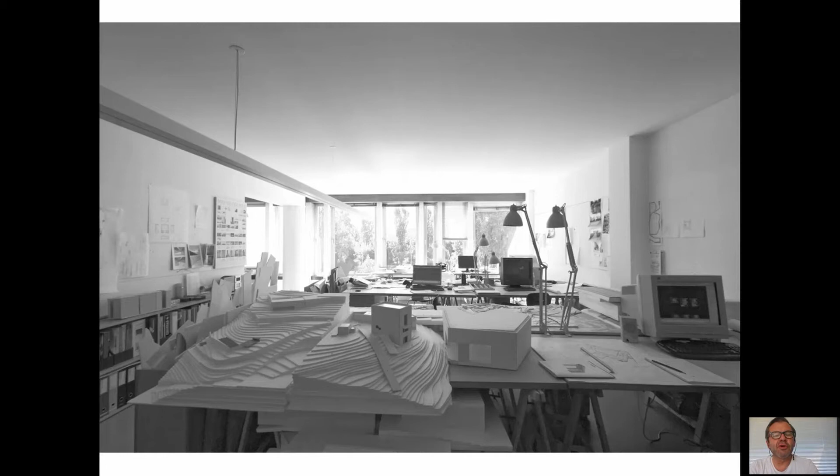I'll show you a little bit the way we work. This is my office, quite a small office - we've never been more than four people working together. I like working like that because we get to know all the different parts of the project, and I believe that with a group of four people, eventually making partnerships with others, we can do all the projects that we can, and we can also control all the details of the project.

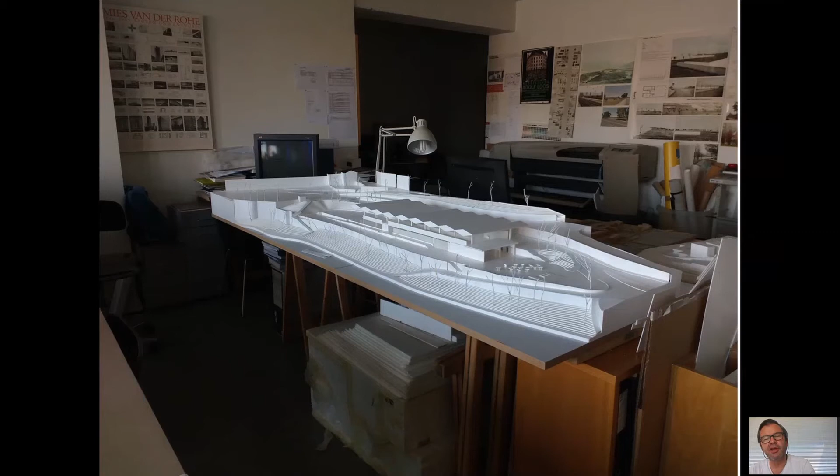So we live in this very banal way that architects work by now, with models and computers. This is another photo of my office, with mock-ups, old windows from buildings that we are trying to copy during restoration, spaces for models, and thoughts on the walls.

An office is always a place where you should think about the things you are doing, not only in your projects, but about the most essential things, and also eventually, naturally, references that you have, both images, architectural or not.

Where am I showing this? I think I am speaking mainly to students. My experience giving lessons, which I gave about 15 years ago in 3 different countries, is that I feel the same problem with students now: they only use computers, or use them in a too expressive way, without getting all the tools we have by hand. I have nothing against computers, I use them a lot, but I try to use all the means we have at our disposal so that we can turn the project or the problems of a project clearer.

And sometimes when I look at younger people, they only use computers, which is something that it's a little bit... well, at the end, what's the point is that the project is good or not. But I think it's a little bit poor when we go too much only into a sort of representation of a project.

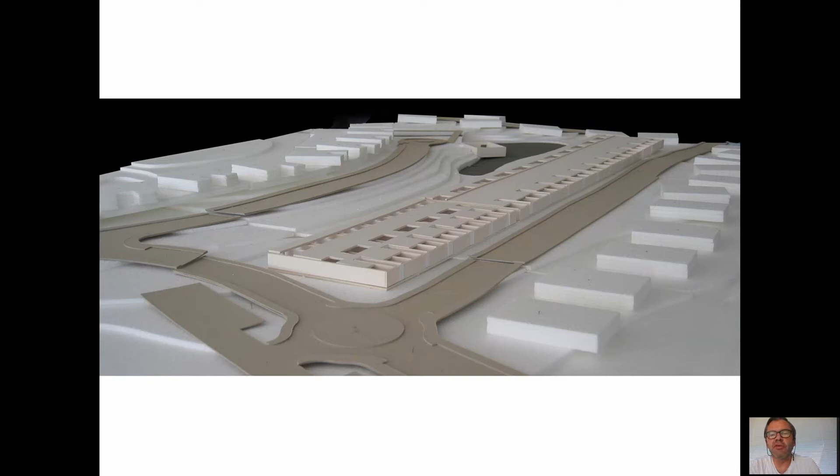The plan, I must say, although it's not very polite, was really bad. The plot that I would have is this one here—I don't know if you see my arrow—which was a strange plot. And in the plan there were six volumes, 3 or 4 stories high.

Well, I tried to condense them into only one, because I felt somehow a lack of order in this plan. I condensed them all into a building which is, I guess, 220 meters long, so a very huge and powerful building—my response, mainly a radical response to the lack of order I could feel in the plan.

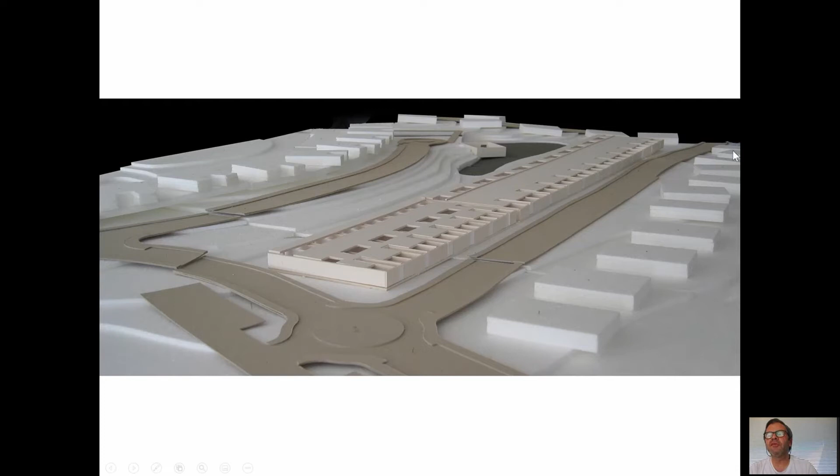I had another problem: Siza was building on the next side of the street. These houses are made by Siza, so in my first project, if something would go wrong, I would have finished my career in the first project, so it wouldn't be nice.

This is the plan of the houses. These are the 30 houses. They're all equal, in groups of 2, in a very strict line here, where the facade is only a wall.

At the end—me and Siza, we didn't work together on this project. I only got to know his final project when I was showing him mine. And I think we were both satisfied that we made it so different, because the way I put my longer, very strict wall helps Siza's buildings.

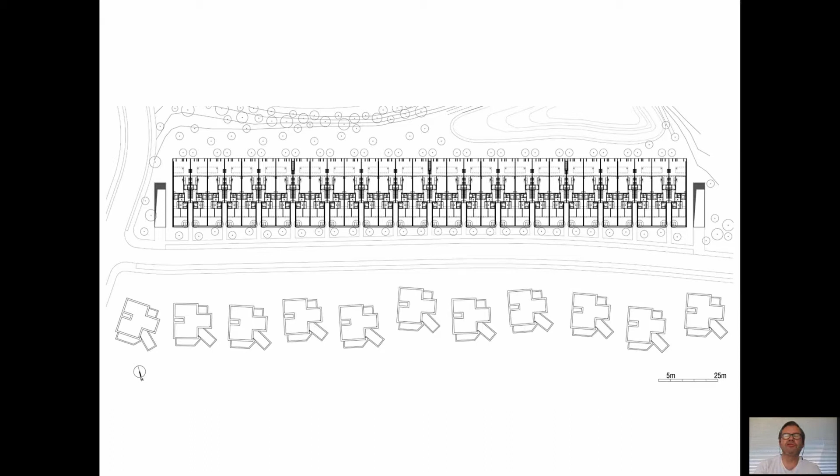This dancing plan is made of short little adjustments that he was making to the topography, or just little accidents that happened or that he invented, but it's the same idea. Mine was absolutely the opposite, so if I had done the same as him, it would have been a big confusion.

The houses are relatively simple. You enter here on a corridor, an open corridor, and then you have two houses. In their space, the rooms face north towards a courtyard, and the living room and kitchen face south towards another courtyard. The courtyard of the rooms is completely closed to the street, so that people have privacy and not the noise that comes from the street.

And the courts to the south are open to the common garden at the south. They are mainly covered, as is usual in most southern countries - large open spaces with a roof, so you can stay outside, not in the sun. But they are not completely open.

They have a great mesh of irregular concrete walls that give an irregular facade, so to say. Another point was that all the architects had the same materials to build with, and it was very nice to see how everyone with the same materials made a difference. I think you see the differences better with the same means than when everyone does what they want.

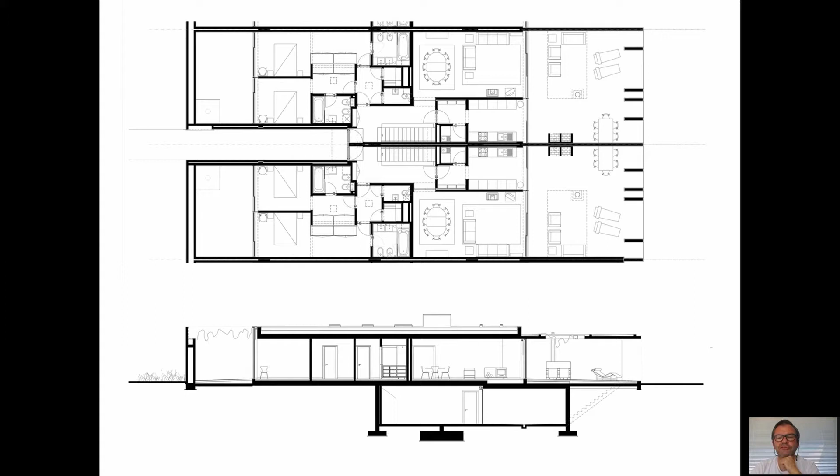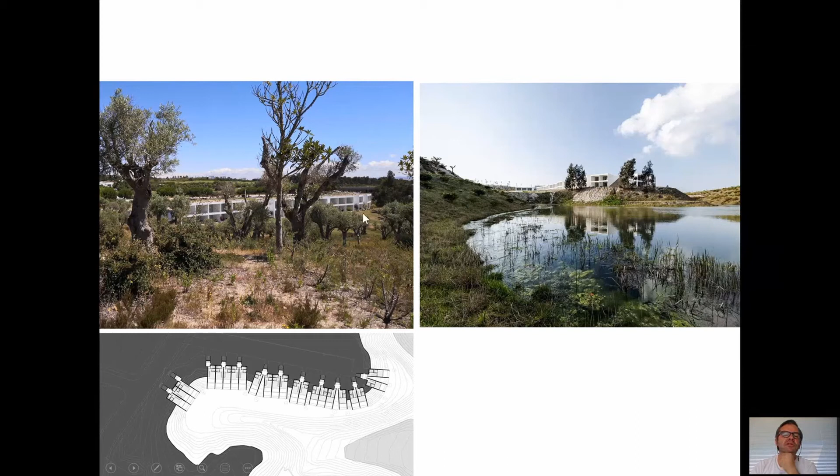Well, this is the first project, and it's not only one project. I will show here other 6 or 7 projects that I made in this resort, in another situation. Also houses, row houses that are here in a very difficult topographical situation and in a very different topographical situation.

The upper part, you enter here through the upper part of the plot. It's the only entrance, and so you enter through the roof of the houses, and the houses somehow repeat the shape of the topography. Well, this repeat is a little bit ambiguous - they try to repeat, and it's not fully repeated, but at the end, the image is that. There's also a lake, a natural lake here at the end, and this is the image.

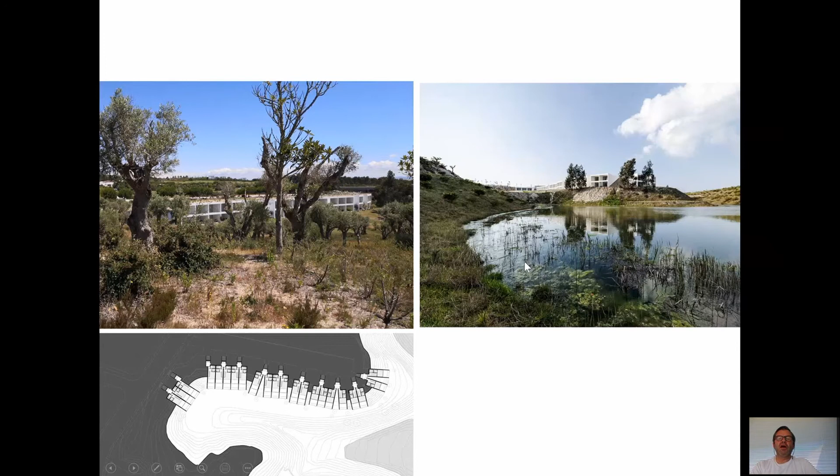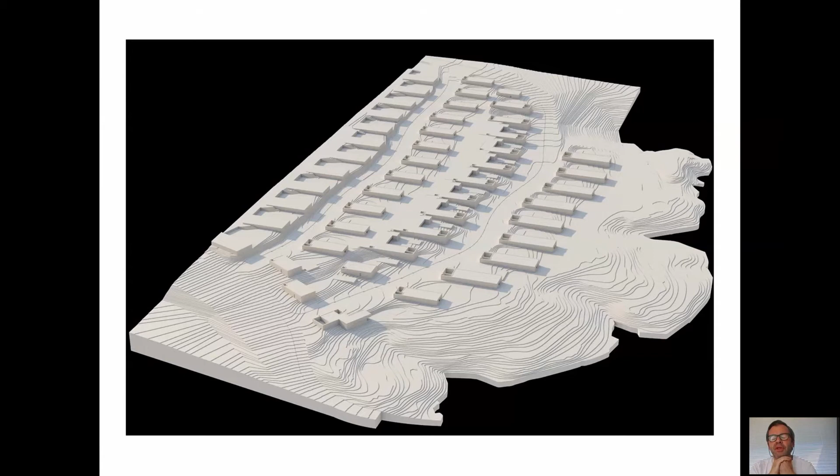I also made a lower part of a hill, which is this part here. This is a golf course, a very big golf course, and the upper part of the hill was made by Eduardo. So once again, we were having the same problem - there was no very specific rule of this plan, and I and Eduardo tried to impose a rule on this hill. Well, at the end, you see here the views of the golf course.

I don't want to show the houses each one, I don't have time to. These are the houses, the model houses. There are about 40 houses or so, and they stand like this - the middle of the house is the middle of the axis of the garden of the house in front. So it's better with the views, and it also gives you privacy because the house next to your house has a completely blind facade.

So the space in between the two houses is a courtyard that here in the beginning is still very open, but it's a courtyard that defines also the house as a closed space, open just to the views on the northwest. There are some islands in the Atlantic that are very beautiful. So what was missing here was the vegetable elements that with time grow, and these are the streets as they look by now. The houses look more natural.

I've made also some equipments. This is a garage for all the gardenings of this huge resort. It's a building like 3,000 or 4,000 square meters, I don't remember. Made also with a colleague of mine, Luisa Rosas. She draws jewelry by now - she's a very well-known jewelry designer here in Porto.

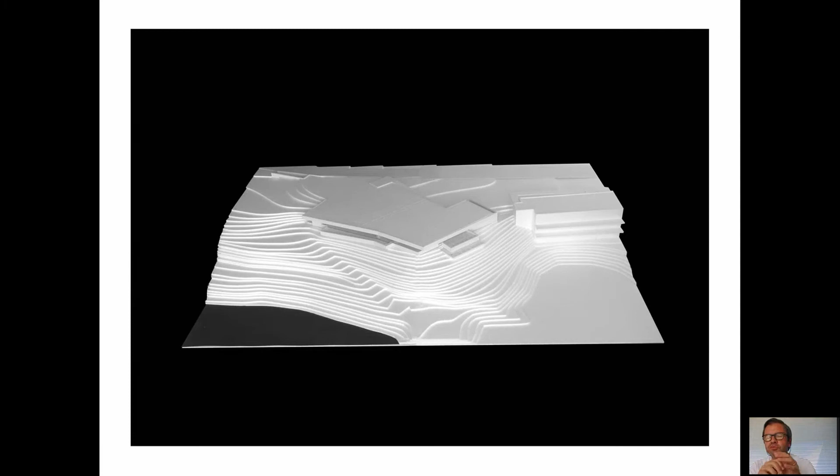The building is mainly a slab put on some stone walls, facing this slope towards a lake. So this is the position of the building, and once again it tries to adapt to the topography. Once again, I had another problem - Eduardo was building a huge hotel here, and we didn't know the project because it was being made later. I knew some elements, but at the end it got completely different. And I had the problem that my building could be a little bit too small when compared to it, which could be a problem. From the outside, I got it to just be a wall.

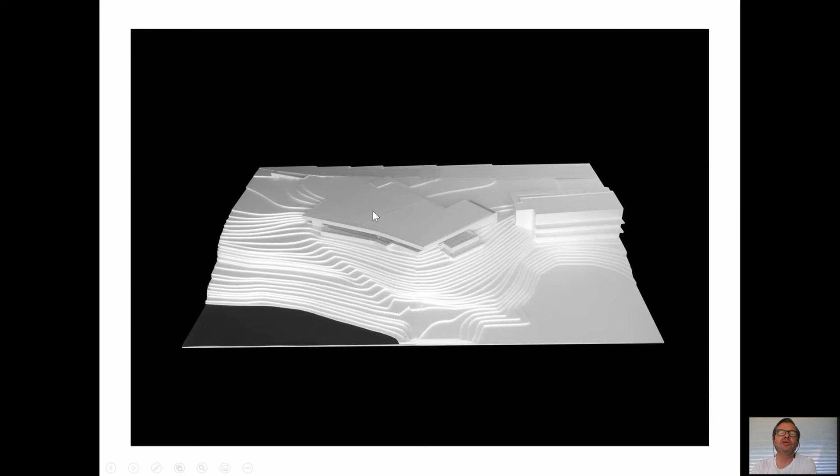This is the street here, and you enter through this covered ramp, and here you open towards two sides. This is towards the end of the golf course, which is very important that the bar faces the end of the golf course. The first hole of the golf course begins on the roof, which was also a premise of the project, and the restaurant and the other part of the bar are facing the lake.

To the street, it's just a stone wall, and these are the elements from inside where you could face all the surroundings. This is the facade towards the lake.

You see that the building is mainly a slab, a very thick slab. It's more or less 140, I guess, or 150. It's the dimensions that were calculated to have grass on top of it and to have all the technical equipment made on top of it.

I drew also, I guess, the final project, the tennis club, and got a little bit the same strategy. You don't get imagination to do so many projects in such a few years.

The entrance is through here. You climb down the stairs towards a patio, and there's also another service entrance there. It has a wonderful view. You don't see it very well, but it has a beautiful lagoon, the lagoon from Óbidos.

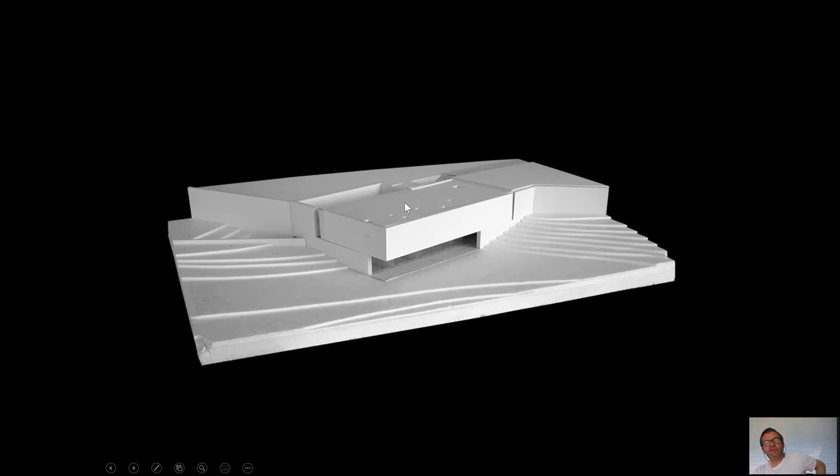You enter through the roof, and you see there a hole. You climb down the stairs. This was very much done in the place, because I was seeing, put this wall a little bit in this direction. We have to save this tree or this stone, also something like that. Stones appeared when we were digging and so on.

And you enter here on this plan, left. You enter here on the first floor. You have the rooms facing a courtyard and another room.

And on the second floor, you have living rooms, also a snooker room and so on. Very big dinner room because the family is big, kitchens and so on. At the end, this was also built with other equipment and so on.

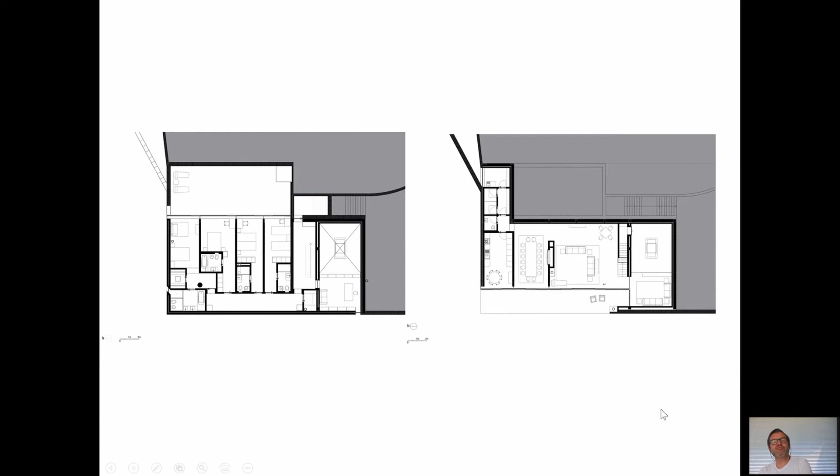All these elements are facing this big veranda that overlooks the river. So this is the entrance, and this is one of the rooms. They're all mainly the same. They were covered with these meshes that opened, creating some intimacy. You can't look inside, but from the inside you look very well towards the outside.

And the space of this courtyard was also designed on site. This is the lower floor. You climb down the stairs, you have the living room and the space where you get outside, and you get the connection to these platforms. Well, this is more a garden, and then the other ones are more agricultural elements.

As you will see here, this is all very rough. All the buildings are made with huge stones in a very rough way. I didn't draw anything. I just drew the position of some walls, the position of this tree, and these old stones that we found there that were a small tank — like a swimming pool, but only for agricultural reasons.

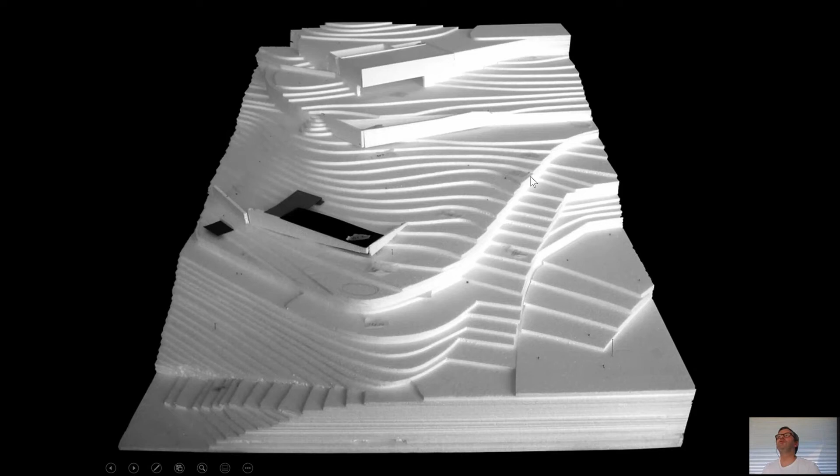And then this is the house that somehow disappeared, because near Porto it rains a lot and nature tries to make architecture disappear. So this is a study of the walls that I changed a little bit to get some space and to make the house look like one of these natural stone walls that somehow relate to the topography. Here you see the roughly built stone walls. Personally, I like it, but well, it's impossible to draw.

Well, this is refurbishment, and we'll mainly talk about refurbishment by now. Although refurbishment is not a special theme, it obviously has some special characteristics, but mainly I think that all architecture is built over something. Even nature is a construction. So we always build on something that's already built, even if we build in nature.

In this case, we built in ruins of old buildings. So we must take care in the same way as we take care of trees and rocks when we are building in nature. We take care of walls, windows, and other elements when we are building somewhere else.

This is what I found there. It had been a group of houses, agricultural houses. Here on the right, this was the main house, and all these here were agricultural buildings. It had been very much destroyed, especially this building, and very much changed.

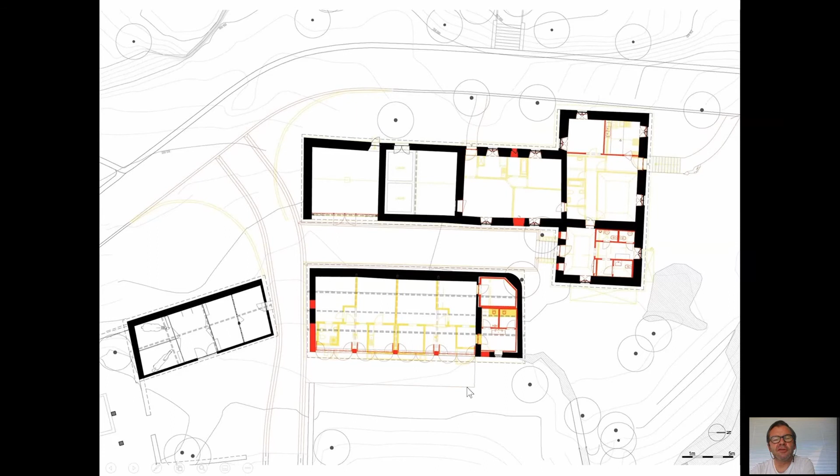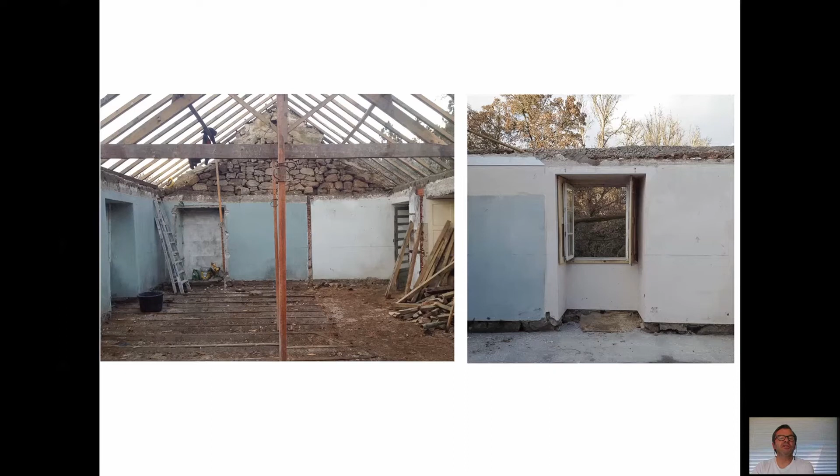We did a lot of research about the windows. Windows are one of the most difficult things to do in refurbishment architecture, I guess, because the windows in Portugal — and I don't remember very much in Italy, I guess also — but mainly in Portugal, due to our relationship with England, these very thin Victorian window frames have also a big importance here in Porto.

Well, these are not Victorian frames, of course. These are regular rural frames, but they are always done with little means, with only the necessary elements that we need. No centimeter is bigger than needed. The problem is that nowadays the tendency we have is that we need air conditioning, heating, insulation, double glasses, and so on.

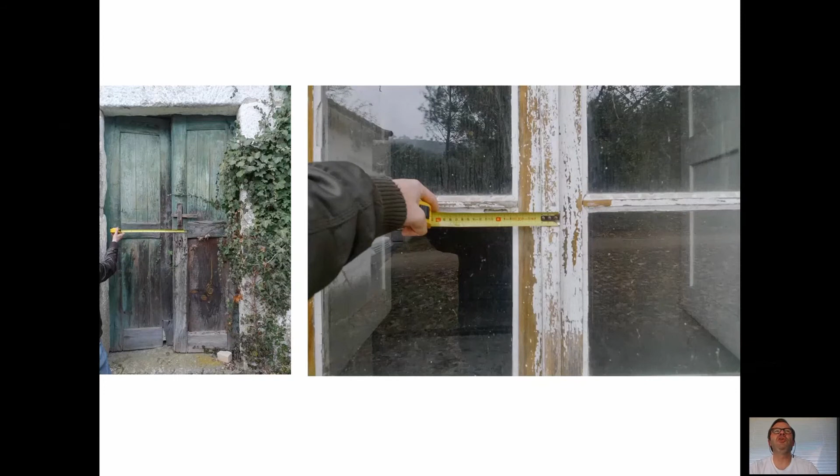I am also sure, from other projects I've made, that when you change one centimeter in a facade, in a window frame of a facade, you change the whole facade. It looks different, even if it's just one thing. It's like when a woman makes a little element on her eyes in the morning, and she looks all different, and it's just like 2 millimeters thick. So that happens a little bit with buildings.

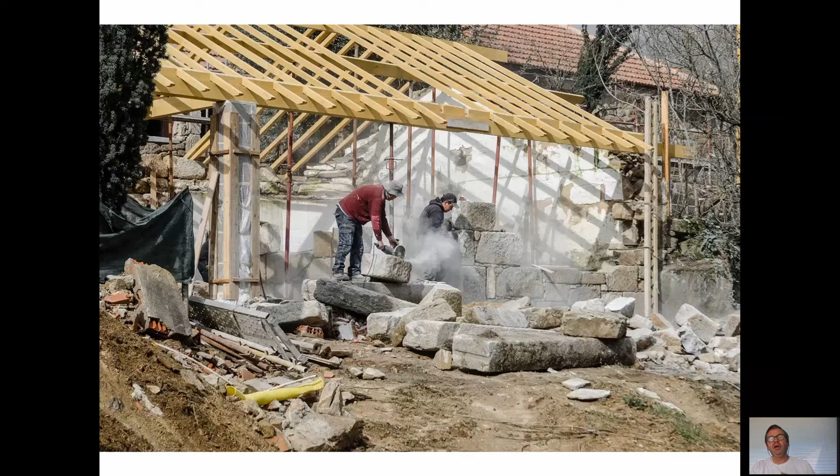The other building, well, I invented a little bit. I tried to understand what it had been before it had been changed. And it had been, I guess, a building to dry corn. It's quite strange, because sometimes when you restore or rebuild a building, you need almost to destroy it everywhere. So a little bit of invention also gets inside.

Trying to understand what I was doing, because I was making a refurbishment, a restoration with a little invention, since I was building new. So my only conclusion is, as a friend of mine said, do the best you can, and at the end you find your concept. It's a little bit like that. It's very difficult to stick to a concept and get only through it. Sometimes you have to make small changes.

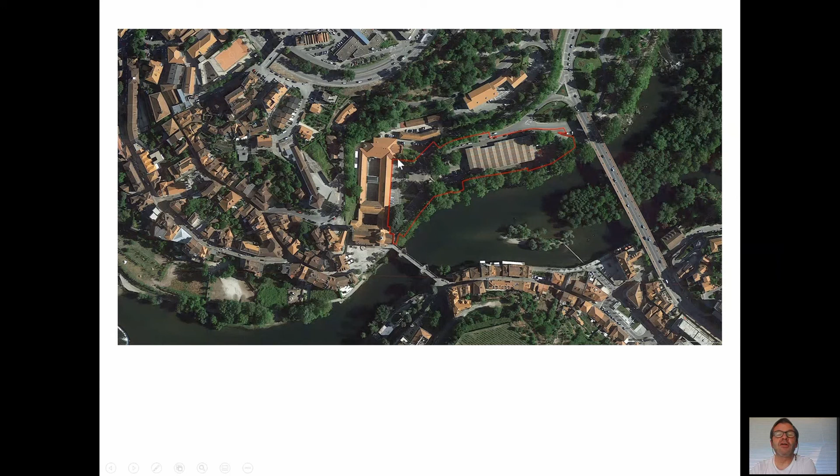Portuguese cities are a little bit like this. It's more or less a street like this, and all the rest grows around the street. I'll try to explain. This was the part that has been extremely changed during the last century. This is the model we made to understand the process.

So we were given the task of readapting the market. At the end, we are restoring the market more or less, and this square also. There's a problem with this market. I once said it's the father of the Braga market from Eduardo, and he was quite astonished. Yes, that's true, but I didn't think about that. But it's true, because it's a corridor in the middle of columns with a cover on top.

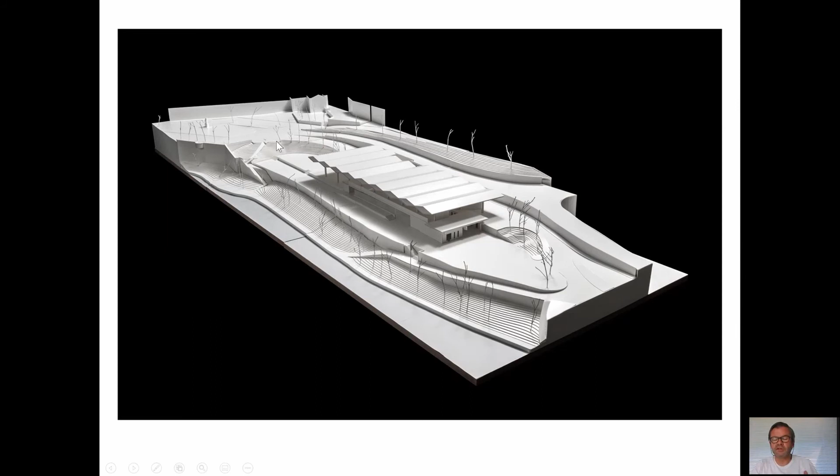Personally, I like this sort of chaotic element. It happens twice a week that people build their tents around this market, and it looks a little bit Arabic or something else, but I like this sort of confusion. The market also holds it, the modern architecture is able to hold this, it's so strong that it holds this sort of big confusion.

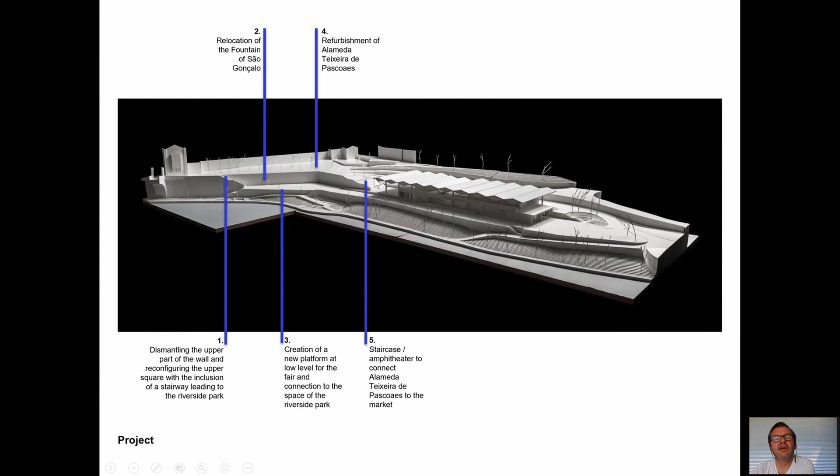towards the river in this element, and does also connect to the upper part of the square. And then we make a big stair in here that we call an amphitheater, so that the big path that is the main element of the 50s market somehow continues to the square.

So this is the project without these letters, so that you understand it better. For us, it seems quite natural.

There was also one other element that it had in the past. It had been a very mythical fountain there, the São Gonçalo's fountain, that had been replaced into the facade of the museum here, of this convent that is a museum by now, and that the people think that that had always been there, but it was not. It was more or less on this place.

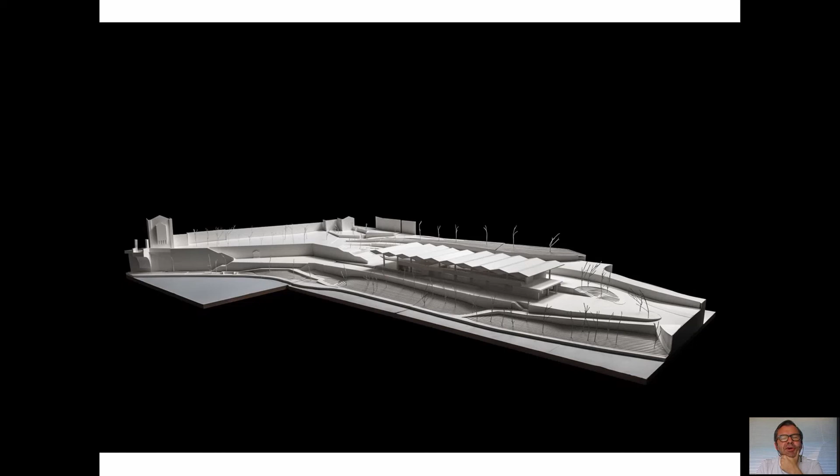So we thought about replacing the fountain to the lower part of the place. This was obviously very polemical, and the people said that we didn't know anything about the city and so on. But at the end, we proved that it was not true.

So we put this line of trees in here to try to divide it, and divided this square into two, which also had the advantage of approaching the river, which is here in a visual view towards the monastery.

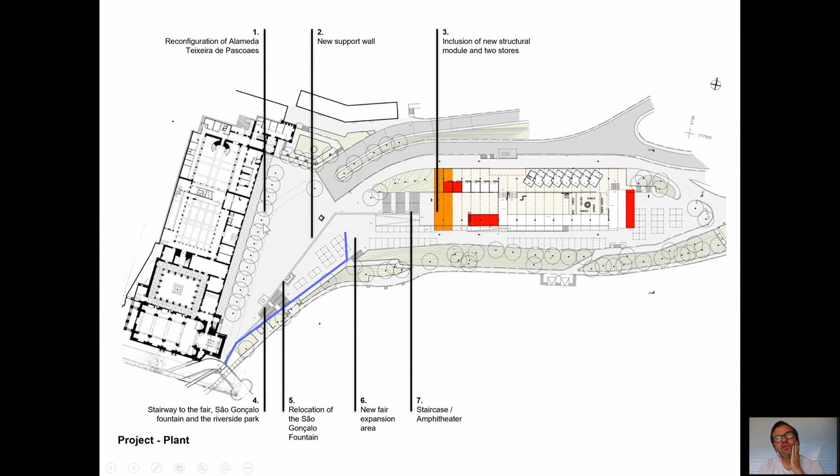The rest you see here, the plan, it's very clear. The corridor that connects to the place. So this is what happens now underneath here.

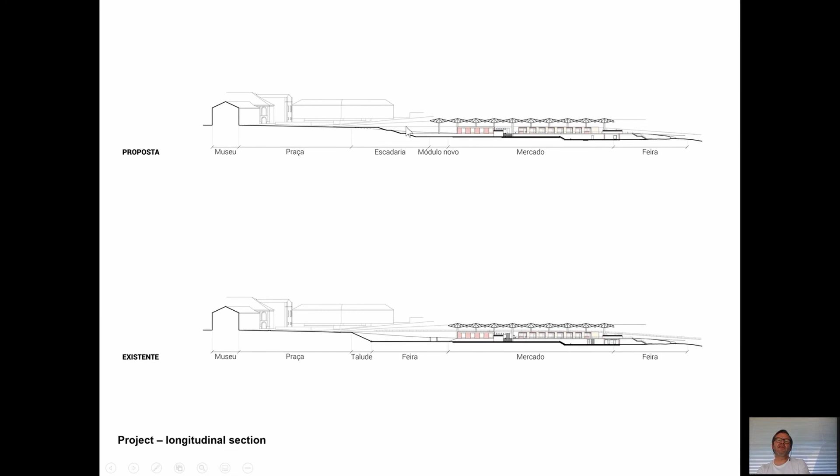You see this very big slope, and we turn it into an amphitheater. There is a very well-known music festival here, and we were proposing to make the music festival inside the amphitheater so that the people could listen on this very huge stair.

And so here you see the new wall and the new stair that connects to the street, to the inside street of this market, while the actual wall stands more or less like this. So it's a very strong wall.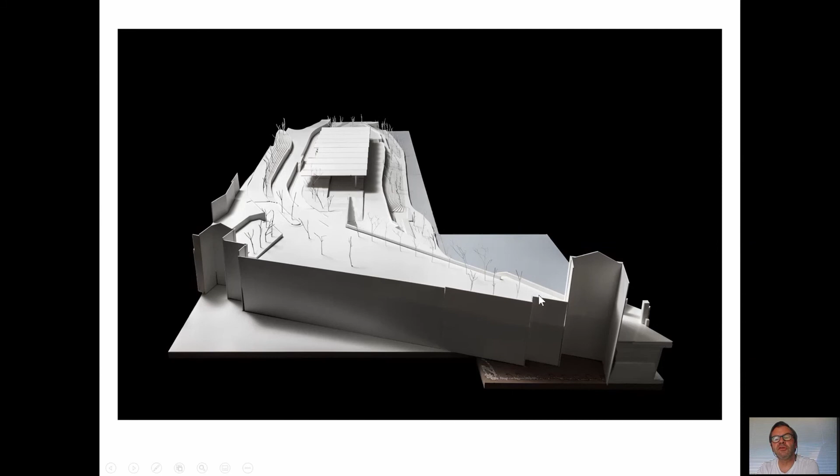And this is the view from the market up to the street, up to the stair and to the upper part of the square and to the lower part and to the connection to the river and to the new fountain. This is the lower part of the fair, the connection to the river, and also the connection

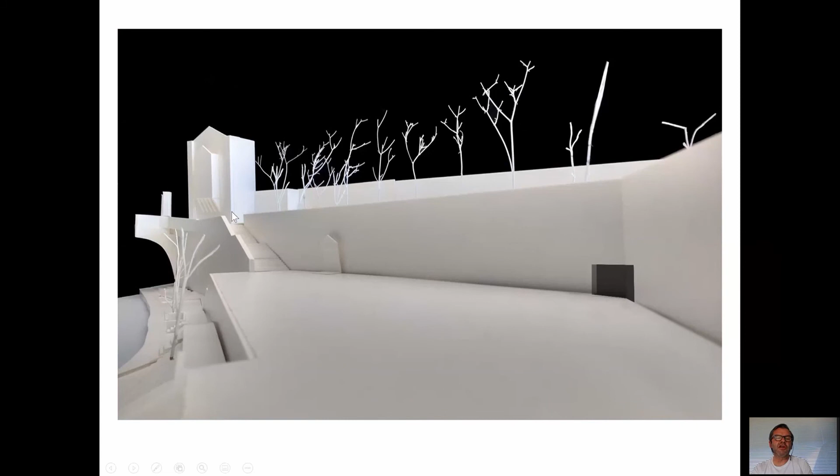to the church. These are the beautiful elements, these beautiful paths that we want to join with our paths along the river. And it's a very interesting theme that we then discovered a lot of plans,

of how it was before, and we so proposed our proposal, and it was very strange, because what we were proposing was more or less what it had existed some centuries before. You see here that this was one of the existing walls, and this was another one.

Of course, this building of the market was from the 50s. So this here was not a square. This was an agricultural part of the monastery, and this facade of the monastery was obviously not a facade of the square. So we should try to do a square with a scale of these elements that could hold this both elements, the square and the facade.

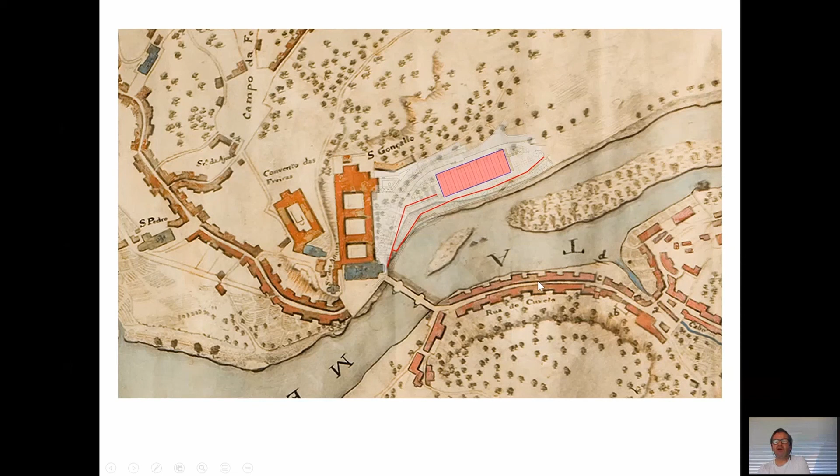This here is what I was telling you about. The main civic center was here. This is a very interesting church, the Church of São Gonçalo here. The old bridge was here, and Amarante was mainly a street, as you see here in this plan.

And this is a plan from the end of the 19th century, I guess. You see here the new bridge that had been built in the 18th century, in the end of the 18th century. In the beginning, there was only a small bridge here in the lower part of the river, but then

there was made a bigger bridge that changed obviously the scale of all these elements. But you see here the stairs, and you see here mainly the steps that hold these agricultural columns and gardens of the monastery. So it seems like that our project was returning somehow a little bit to the past.

This chapel of the church had an extremely big vertical scale, that in the past should be enormous, especially without this bridge. But it worked very well with the stair that was going to the fountain, and with the scale of these elements in here.

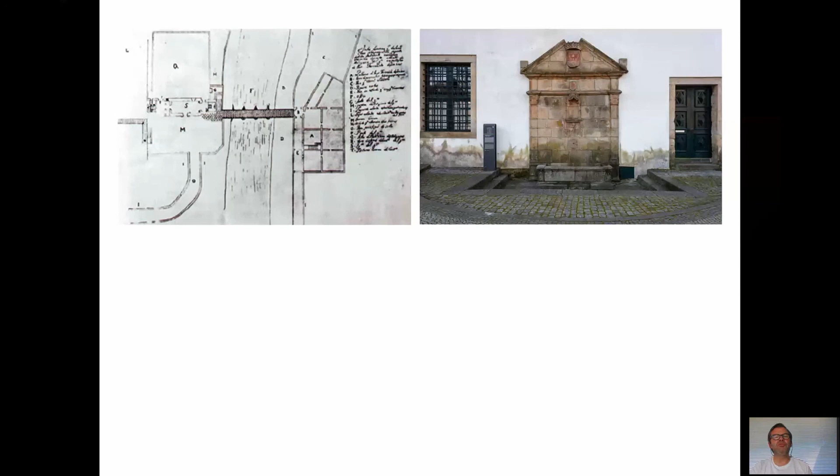This is the investigation we did about the real position of the fountain, and we proved to the population that the actual fountain was not the mythical fountain they believed, which shocked them a little, but it's okay. What we see here is the chapel as it exists by now, that changed completely the scale, and we still hear the marks of the old stair that existed and changed, that would give us the ideal scale of this main chapel of the stair of the church.

Also today they are still visible here. So our project is mainly this.

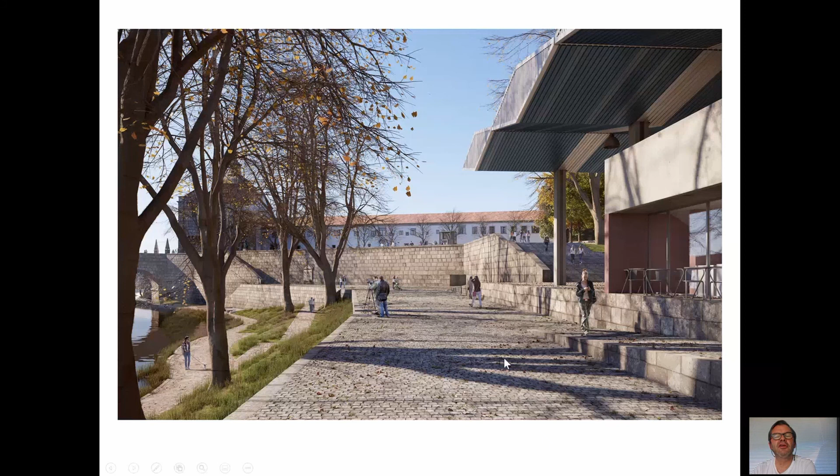And this is what exists by now. You see there's no connection of the fair with the upper part of the square, and this was our proposal, that the fair could be extended there and that it could connect to these beautiful paths of the river, also to the upper part of the church and the bridge, and also here this big stair that would be the amphitheater, the continuation of the inner path of the market.

And the ending of this square is the beautiful vegetation that exists over there.